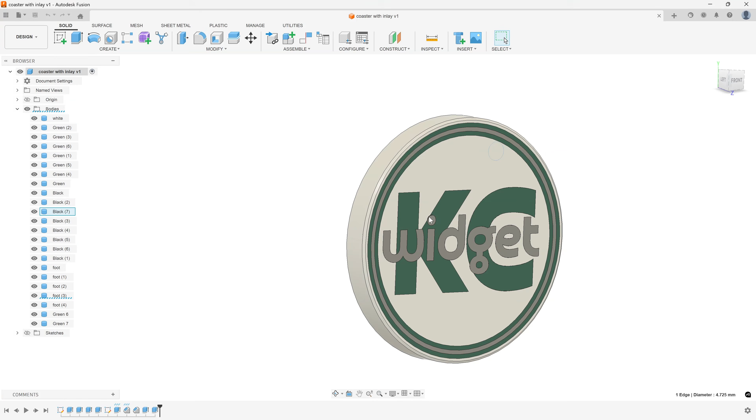Let's take a look at the final coaster design. We used white PLA matte for the main body and then inlaid some shiny PETG green and black to contrast nicely with the logo. On the back, we used TPU for the feet to prevent scratching or sliding on the tabletop. What did I find out that didn't work great on this print?

Well, PLA and PETG do not bond at all. My first coaster had the materials going all the way through and simply came apart when removing it from the print bed. The TPU bonded a little bit better to the PLA. It might be good enough for the coaster. So what did I do to resolve the issues?

Well, I made the back of the coaster solid PLA so that the PETG would only be able to come out in one direction. I also printed the coaster face down on the print bed so there would be some mechanical interlock between the PETG and PLA, basically squishing the materials together. I left the TPU as is, thinking it's probably good enough for the coaster. I wonder if there is a better way, though, than just leaving it as is. There is, and we'll get to that in our next project, the water-resistant project box.

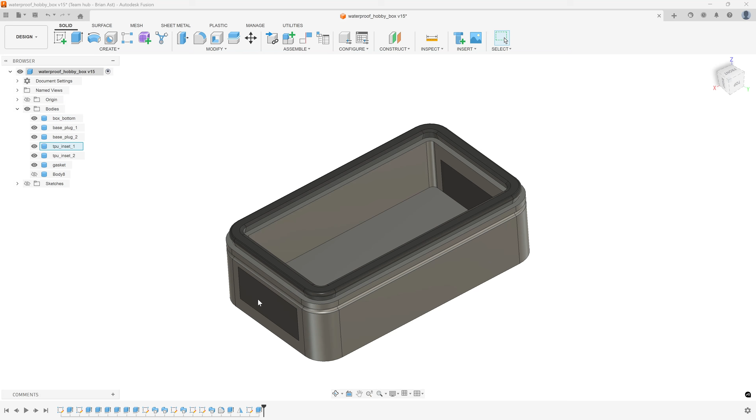The project box is made of white PLA matte with TPU 90A inserts, such as this gasket and the sidewall. The two sidewalls have the TPU section, so you can basically drill holes in these sidewalls, fish wires through, and still have some amount of waterproofing to your enclosure. I designed channels into the box to firmly hold the TPU in place. Remember, we found out in the coaster project the TPU doesn't bond great to PLA. Stick around though, because there's something even better and easier than designing in these channels.

So what didn't work well with this project? TPU for AMS is a little bit stiff and didn't produce the best water seal. I actually got some water intrusion in my waterproofing test. So I switched over and used TPU 90A instead. In that case, the waterproofing test proved that there was no water intrusion into the project box itself. There are specific needs to be able to use TPU 90A on the Bambu Lab H2 series printers.

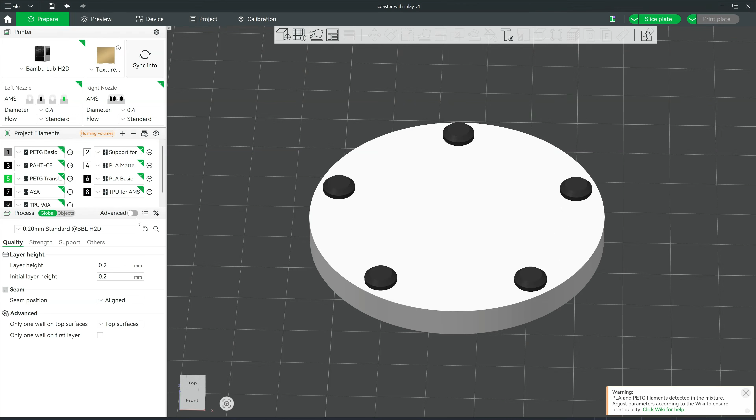You can find the beam interlocking feature by toggling advanced on, clicking on the others tab, and then scrolling down to the bottom where you see the use beam interlocking. If you select that and leave the defaults in there, what you can do is go ahead and slice the plate and see what beam interlocking does.

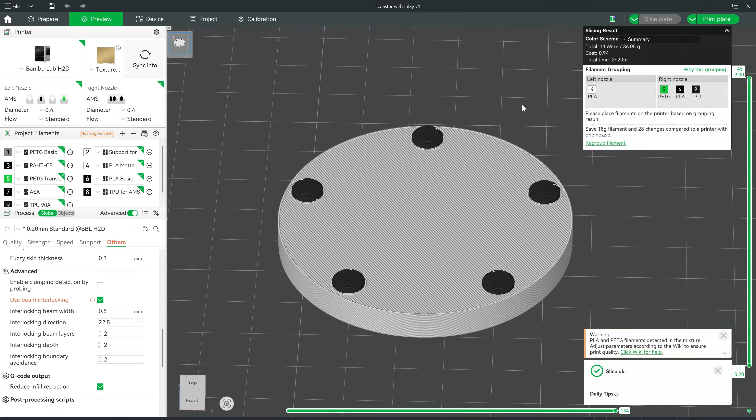So you can see here that it actually adds crosshatches to these TPU feet, where ordinarily the TPU would just be stuck to the white PLA. You now have crosshatches that are going back and forth to help solidify that TPU into the PLA.

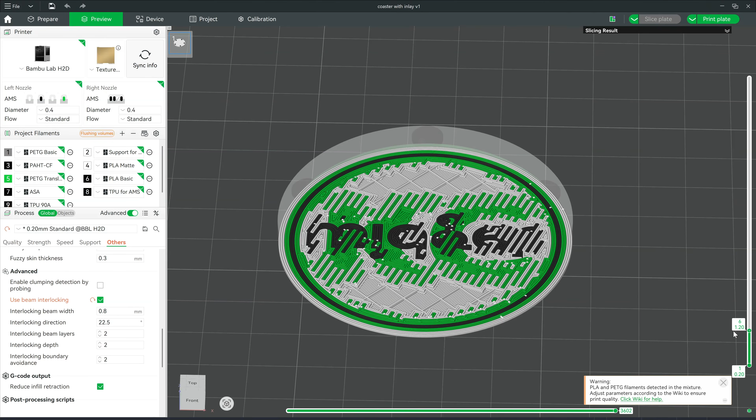If we go further into our print, you'll also see the same behaviors on the logo towards the front of the coaster, where crosshatch patterns mechanically lock the different types of materials, in this case PETG and PLA, together so that they can't come apart. This worked exceptionally well for the coaster project in today's video. It worked pretty good for the project box.

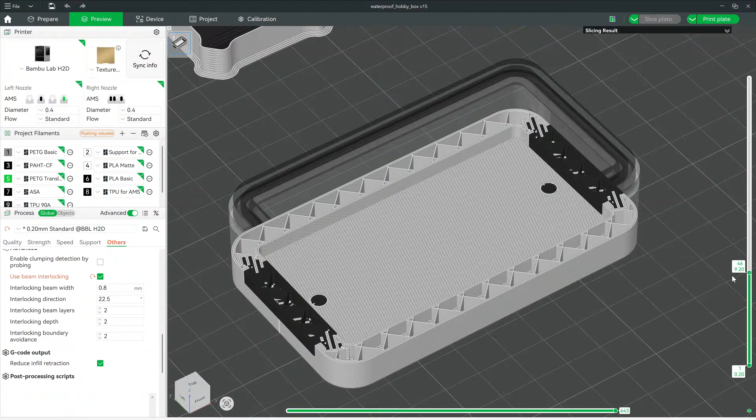One caveat with beam interlocking is that you can't yet specify which materials you do or don't want to beam interlock. If you explicitly don't want some materials to beam interlock, you can't yet specify that in Bambu Studio.

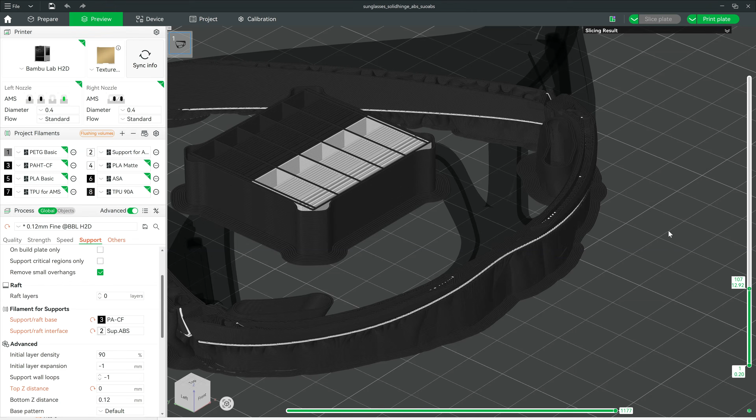Next, let's look at the sunglasses. I kept losing and breaking my sunglasses, and so I decided to design this pair so I could just print off a new pair, snap in some lenses, and I'd be good to go. For this example, we don't use dual material inside the print. We actually use dual material to support the print because of the complex geometry of the sunglasses.

For these sunglasses, we used PAHT carbon fiber as the frame material, and then we used Support for ABS to support that during the print. The frames have a built-in hinge, so all you have to do after the print is complete is take them off the print bed, remove the support material, pop in some lenses, and the sunglasses are ready for use. Like other projects, it wasn't all rosy getting to this point.

So what didn't work well? I tried PA support material, which is supposed to be dedicated support material for PAHT. The problem is it worked well, but bonded a little bit too well to the PAHT carbon fiber. Because it was green, you're left with green flakes on the final print.

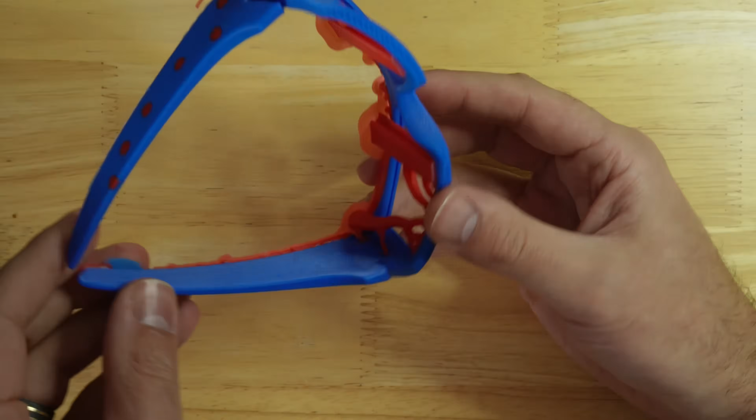I tried ABS frames with dedicated ABS support material because ABS also has some temperature tolerance, but you can see how even after removing the support structure, the ABS support material did still stick to the ABS. It wasn't a super clean removal, although it did work slightly better than the experience that I had with the PA removal from the PAHT carbon fiber sunglasses.

What did I do to resolve these issues? Well, I went back to PAHT carbon fiber because I do like the finished look of that. It hides the layer lines, has great temperature tolerance, and ultimately has a good strength quality to it. So I searched online and found some folks were using ASA as support material.

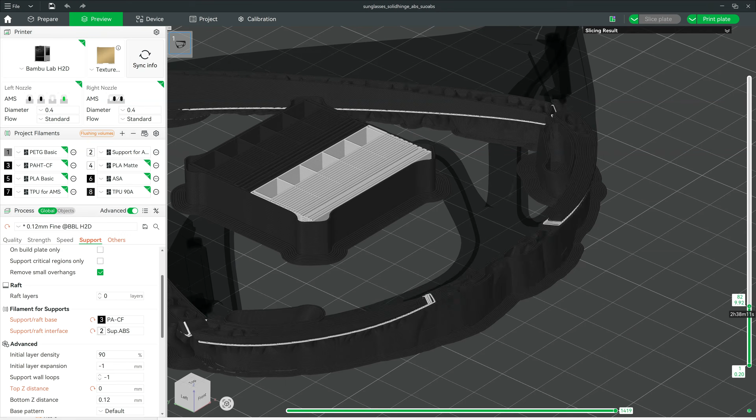A point about the dedicated support materials. They aren't intended to be used as support structure. They're just supposed to be a thin layer between the object that you're printing and the larger support structure that's holding it up. ASA is different in that you could potentially print the structure and the interface layer in ASA and then your object in something like PAHT carbon fiber.

This is great because PAHT carbon fiber is generally more expensive than ASA, and so you can print quite a bit of support structure for very cheap, as opposed to printing that support structure out of PAHT carbon fiber. The only question is, does ASA work for PAHT carbon fiber support? And yes, it does amazingly well.

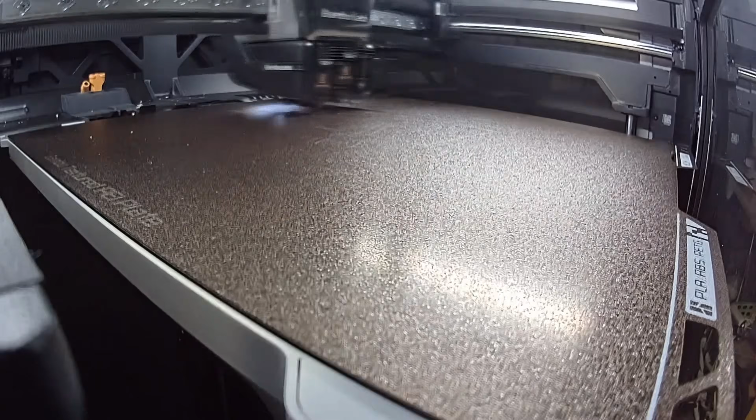ASA was able to hold the print in place, and after the print was complete, it almost falls off of the PAHT carbon fiber. From this point on, I don't see a need for the dedicated PA support material for any PAHT carbon fiber printing I do in the future. I'll just stick with ASA. Another benefit is the ASA is black like the PAHT carbon fiber. If there's any small amounts left over on the sunglasses, you won't be able to see those.